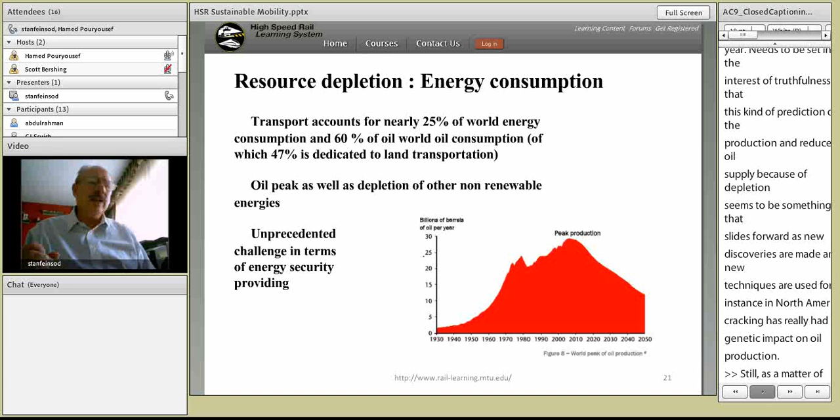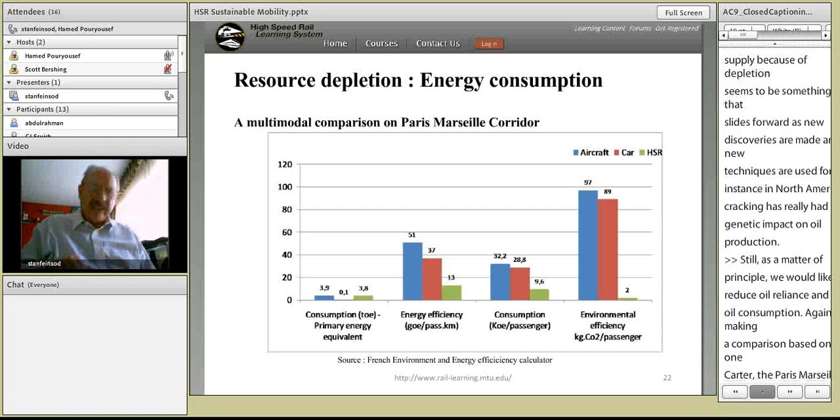So again, making a comparison based on one corridor, the Paris-Marseille corridor. Again, the similar bar chart with the consumption efficiency dramatically in favor of the rail mode.

So looking at the energy consumption at each stage: for the conception phase, improve the alignment to minimize acceleration and deceleration requirements, and design the rolling stock to minimize its aerodynamic impact and air resistance.

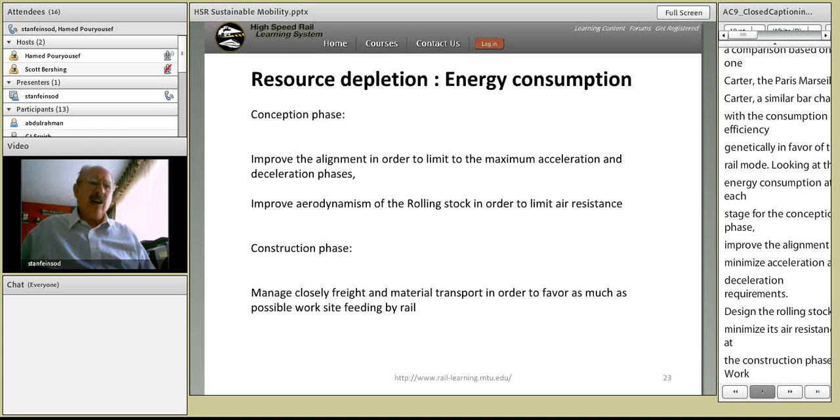At the construction phase, work very closely with the way materials are delivered to the work site, trying to rely on rail feeding. And then for operations, trying to reduce all the environmental and energy requirements during operations.

Here's a goal that has been set by the SNCF in France with respect to a reduction in consumption, about 12% to cut from the current utilization, with utilization being translated into cost: 800 million euros for traction and buildings, 700 for traction, 100 for buildings. They're moving through the system looking for ways to cut that by 12%.

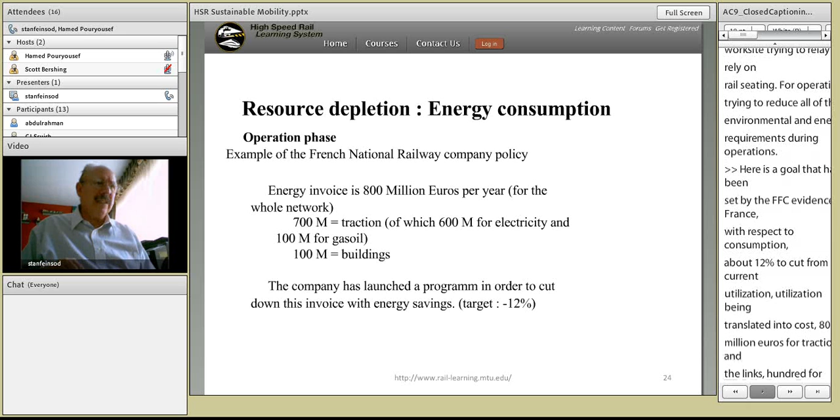Some of the methods already implemented by the French National Railroad: improving time schedules to avoid acceleration and braking using software, and giving instructions to the operators; regenerative braking, which adds energy back into the system; changes to the air conditioning system technologies to reduce cost; and better, more green designs of all the administrative buildings and stations.

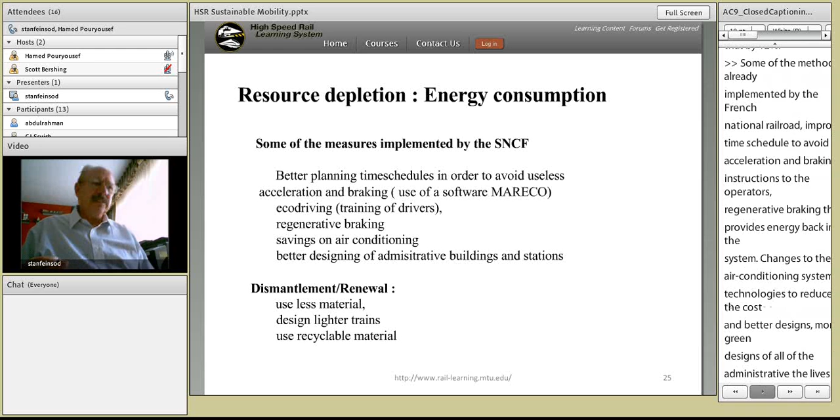With respect to end of life, again, trying to design lighter trains, recyclable material, and less material. With respect to the impact on the land...

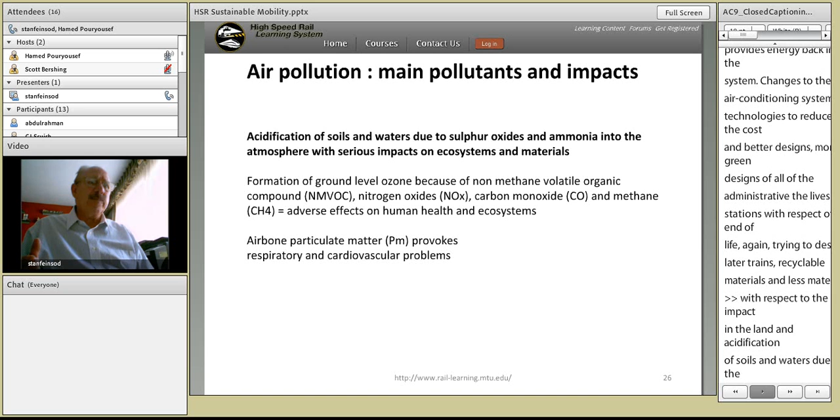...of acidification of soils and waters due to the impact of emissions, there's significant science about nitrogen oxides, carbon monoxides, methane, etc., and the rail mode reduces the impact on the human environment of those things because the high-speed rail lines are 100% electric rail traction.

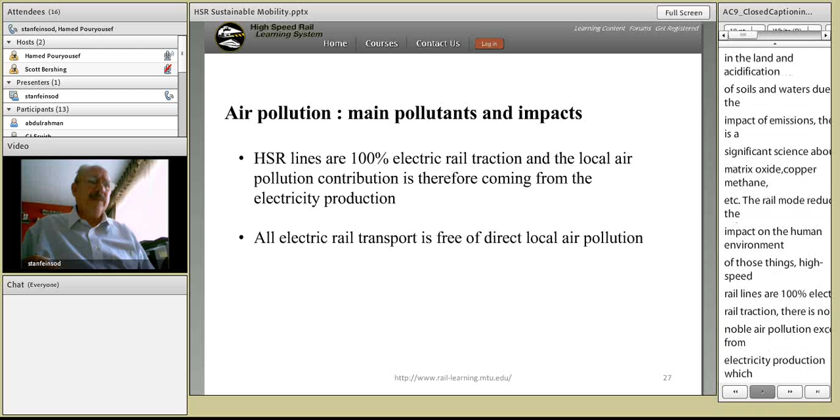There's no local air pollution except from electricity production, which has really taken a great deal of attention to reduce emissions. And so there is no direct local air pollution from high-speed lines.

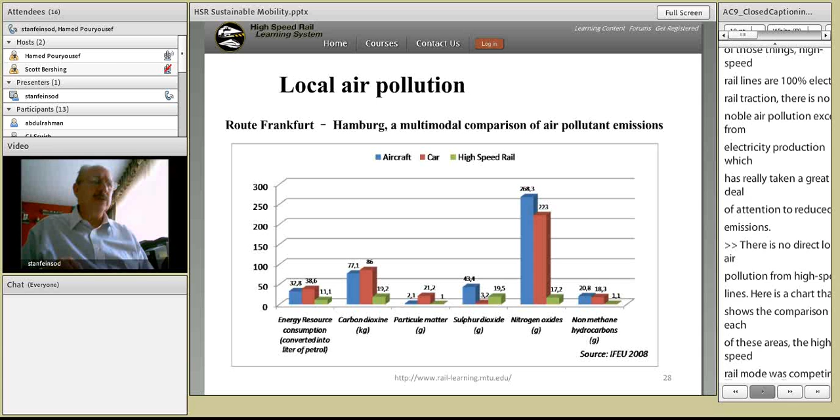So from a conception point of view, try to reduce the energy production emissions, and that is working with the electric utilities, working at the substations, and trying to take a multimodal approach to make it most efficient to move from road and air to the high-speed rail system and have the maximum modal shifts.

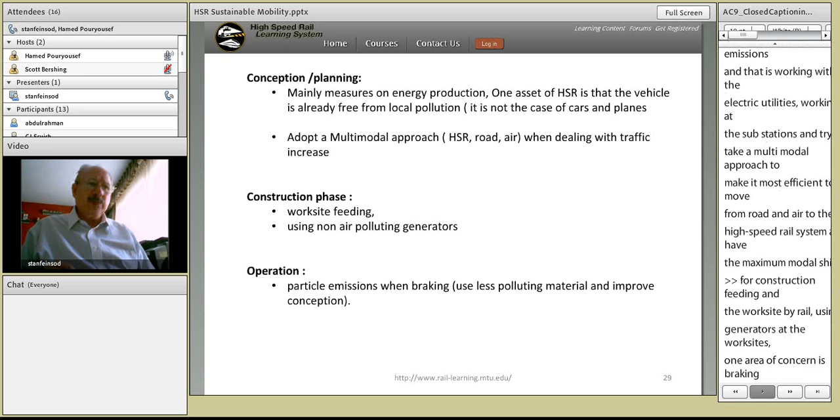And then for construction, feeding at the work site by rail, using non-air polluting generators at the work sites. One area of concern is braking and particle emissions, and there's a lot of work and research being done to find less polluting materials and improve the design of brakes.

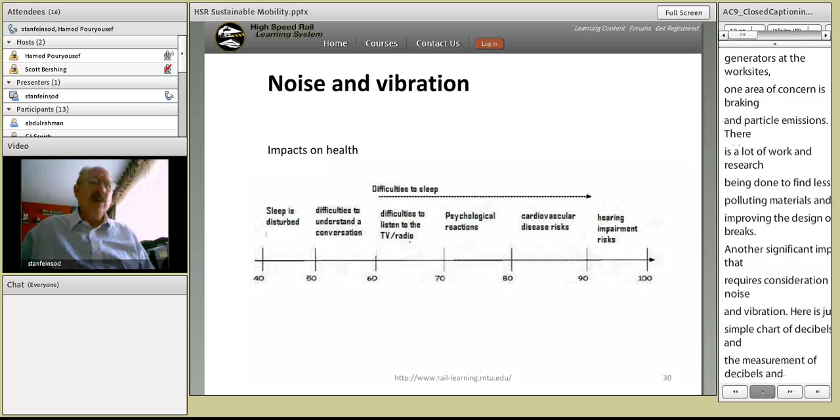Another significant impact that requires consideration is noise and vibration. Here's a simple chart of decibels and the measurement of decibels and what the risks are. So you're looking at 40 decibels where sleep is disturbed, all the way to 100 decibels where you have hearing impairment risks.

Noise and vibration is a significant issue on high-speed trains. They're moving very rapidly. They have wheel-to-rail noise propagation, the aerodynamics of the pantographs which are drawing power from the catenary, and the aerodynamics of the rolling stock itself.

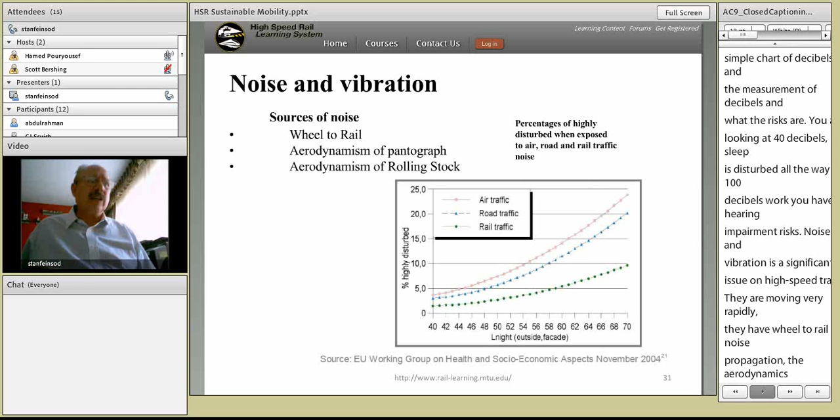There's a great deal of work to reduce these sources of noise. We have rolling stock improvements, new designs for pantographs, working at tunnel entrances and exits to avoid the propagation of sonic booms, looking at track design to minimize the noise of the vehicle rail track interface, and at stations trying to mitigate noise propagation as trains enter and leave the stations.

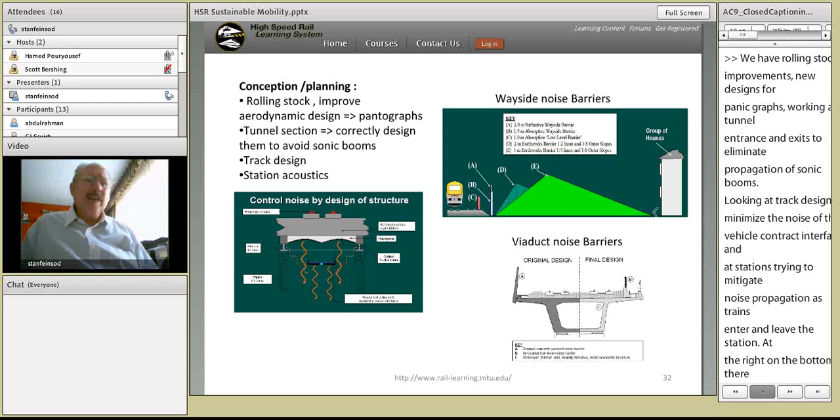On the right at the bottom, there's a viaduct design showing some changes to the barrier that has a better noise propagation mitigation impact. And looking at on the left, the design of the structure from the point of view of noise propagation.

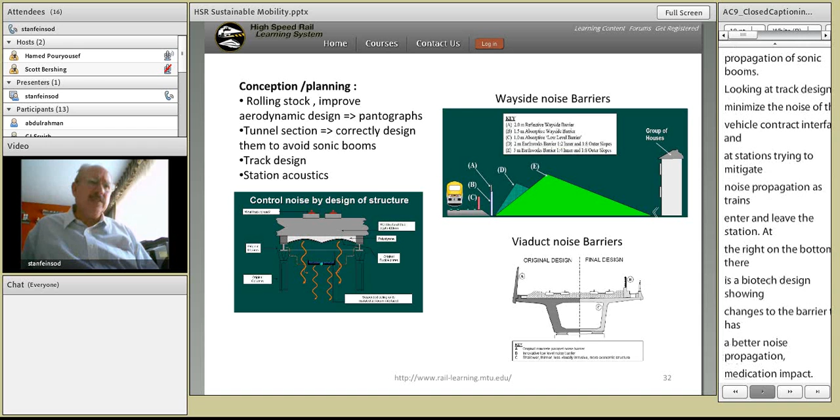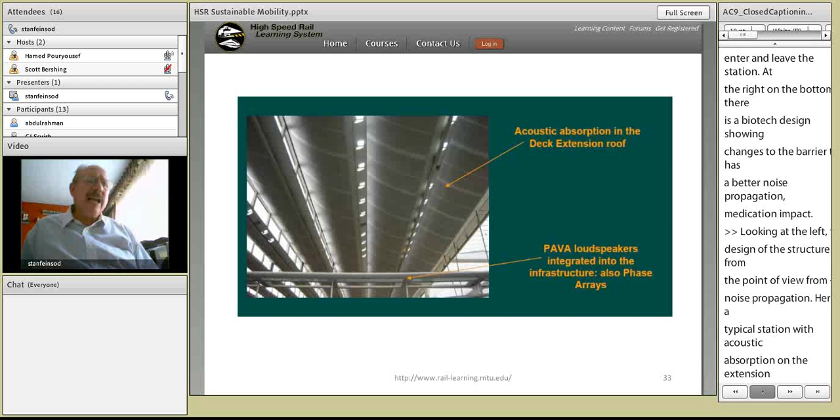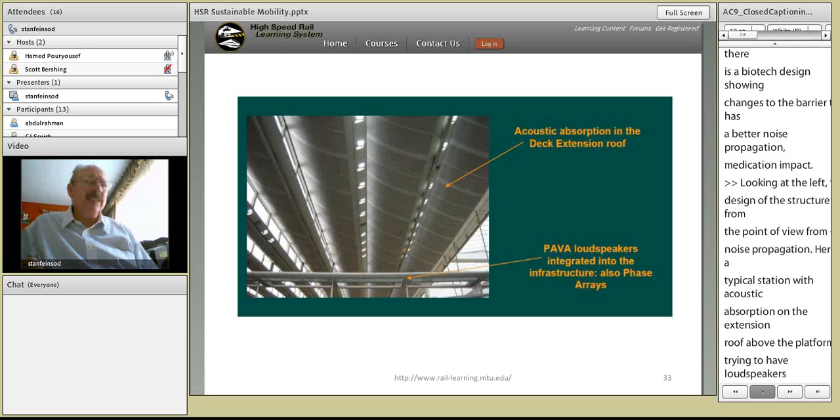Here's a typical station with acoustic absorption on the extension roof above the platforms, trying to have loudspeakers installed in a way to reduce the actual noise that is made by the loudspeakers, basically focused on the actual message.

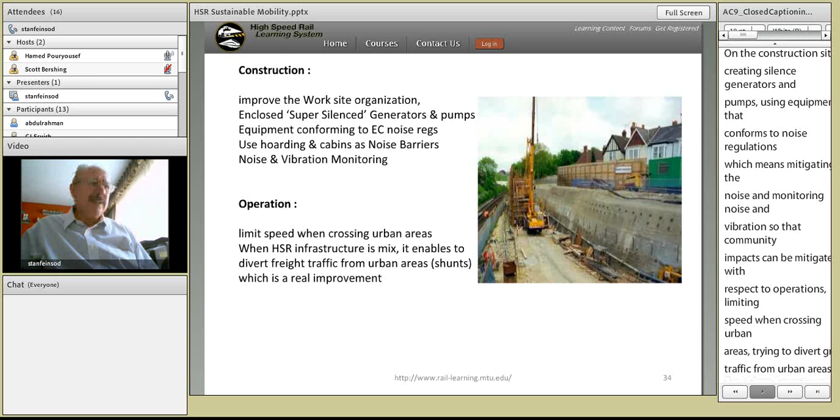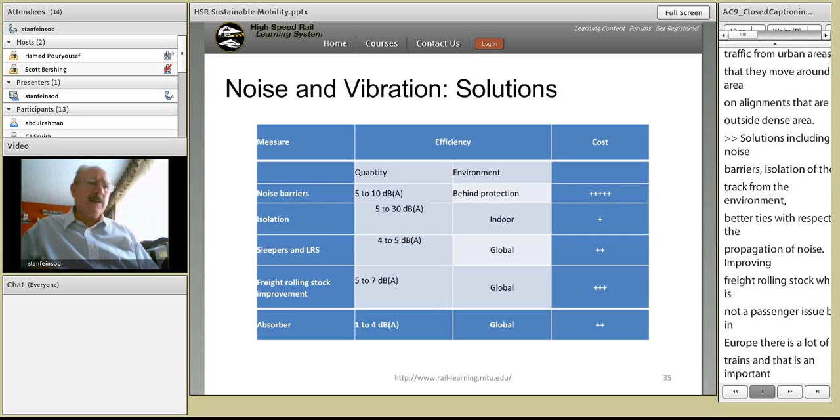Trying to divert freight traffic from urban areas so that they move around the area on alignments that are far outside the dense area, and solutions including noise barriers, isolation of the track from the environment, better ties with respect to the propagation of noise, improving freight rolling stock, which is not a passenger issue, but in Europe there's a lot of freight trains, and that's an important area of noise mitigation. And then using absorbers to reduce noise.

I think the best practice discussion about Japan is important because the Japanese rail operators have really spent a huge amount of money and time and energy researching noise propagation and reducing their noise propagation. Here you can see they've used rail grinding, cables, speed increases, pantograph shields, carriage design that is more aerodynamic and less noise propagating, low noise carriages and bogie design at the bottom of the rolling stock. So each of these activities, as speed has increased in Japan, noise has been reduced.

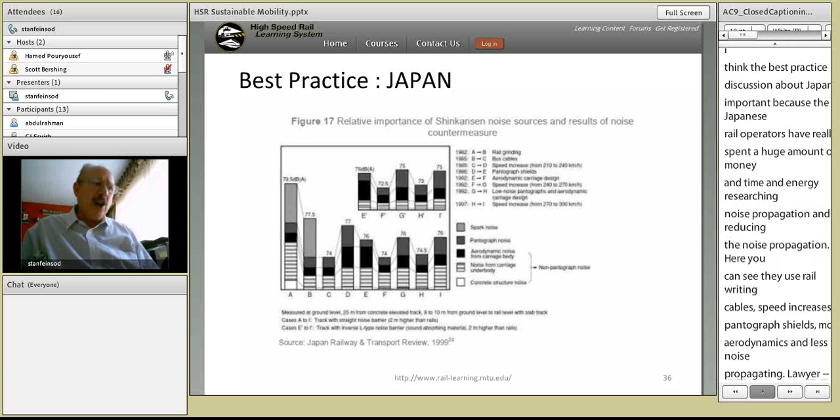We're going to just go for a few minutes about biodiversity. We are concerned about wildlife mortality and disappearance, in looking, first of all, to find where there is endangered flora and fauna, how we can mitigate that. Here's a typical wildlife overpass created solely to permit the wild animals of the area to move across the right-of-way without entering the right-of-way.

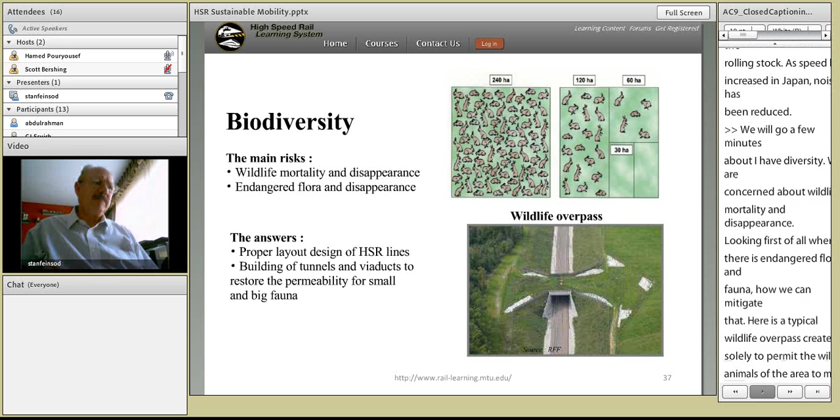So the layout of the design is informed by the research about wildlife and about flora and fauna, trying to avoid the most sensitive areas, restoring permeability, the ability to go across the right-of-way for small and large animals, trying to create fences that secure the right-of-way and take into account the actual population around the right-of-way.

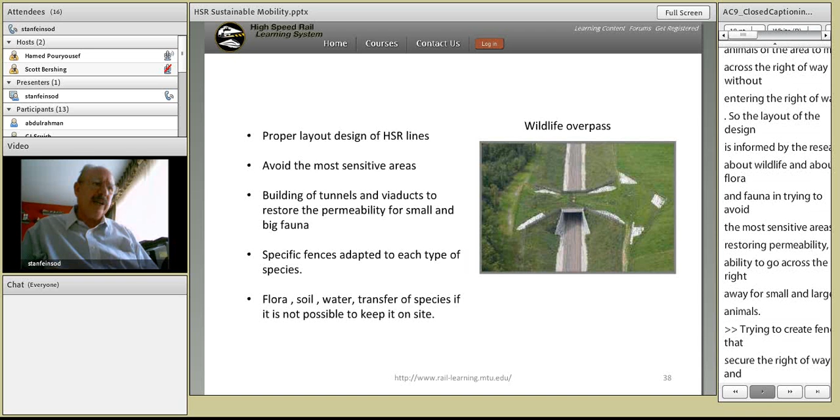In the construction period, identify what is to be protected, avoid pesticides, monitoring all transfer operations, and then during operations, strictly following the methods and operating proposals that were made during planning, and making sure that no incidents take place that might endanger flora and fauna.

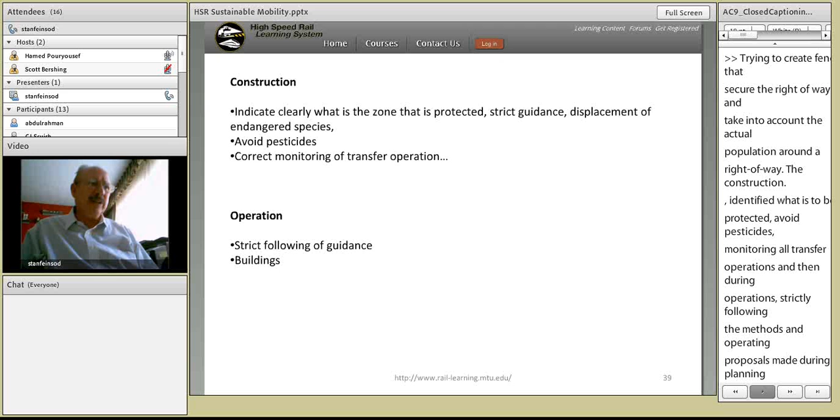So in terms of landscape and cultural heritage, we worry about visual intrusion, landscape fragmentation, and this is an issue of direct importance in the California project right now. The destruction of cultural or historic heritage sites, that is a definite something to be avoided.

Look at landscape integration, really taking a holistic look at how the alignment is going to impact on the landscape. Creating compensation to assist landowners whose land is being divided from the impact, and respecting corridors that are streams, biological corridors that are important. That's a roundup.

It gives you a sense of some of the attention to detail in the entire area of sustainability. The high-speed rail programs in Europe and in Asia are proud of their contribution to sustainability.